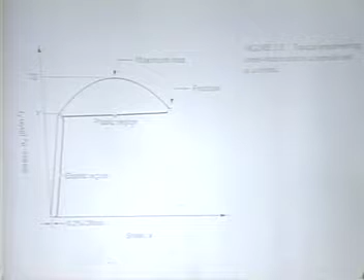Mechanical properties are experimentally derived from testing a round tensile bar or flat tensile specimen, exposing it to a load, and tension means we're pulling it, okay? We attach strain gauges to measure the displacement in a specified area. If we divide the load on the bar by the original area, we have the engineering stress. If we take the final length, as we increase the load, the bar stretches, and eventually it necks and breaks, and we'll see that later. But if we subtract the initial length from the final length and divide it by the initial length, we have the engineering strain.

And we can plot what we call stress-strain curves. These types of curves describe the mechanical behavior of most engineering materials. Now, there are some typical properties that we can get from a stress-strain curve.

Most metals, when you stretch them for a certain amount of time, if you release the load, they'll spring back to the original length. The strain will be zero. We call this elastic deformation. If the load increases and you release the load and it doesn't go back to the original length, then we know that some plastic deformation has occurred. Plastic deformation is a permanent change in shape of the material.

So a typical stress-strain curve for a metal looks like this. It has an elastic region, and then it starts curving over. This part we call the flow curve. Where it starts curving over is usually very hard to determine, so we take a permanent amount of strain, 0.2%, and draw a line parallel to the linear part, and where it hits the curve we call the yield strength of the material, the 0.2% offset yield strength.

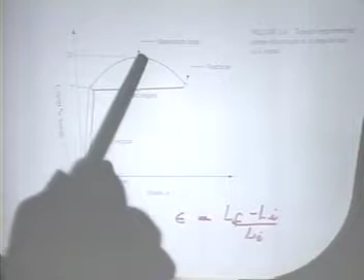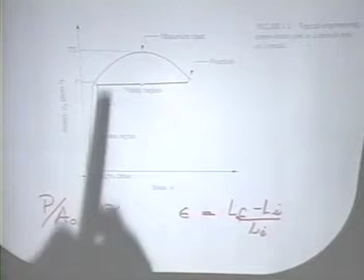Here's the yield strength of the material. We notice there's a maximum load, and after that, continued straining occurs at what appears to be a decrease in stress. At the maximum load, if we divide that by the original area, we have a property we call the tensile strength.

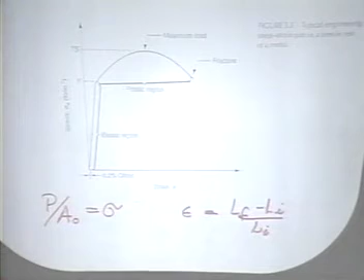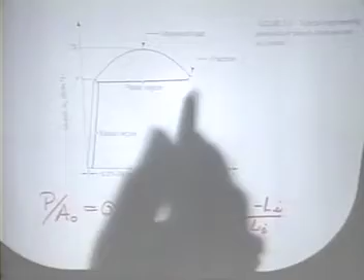That really defines how much uniform deformation we can have in a material, and you're going to see some examples of that. Beyond that, we have local deformation. Some parts are stretching more than others when it starts going down, and then it eventually becomes so thin and so weak that the cross-section can't carry the load, and we have fracture. The stress at which this occurs we call the fracture stress.

Now, if we look at this curved part of the stress-strain curve, it follows a relationship that looks like this, except this time we're using true stress and true strain. If you look at this, something ought to be apparent to you: if a bar is elongating, and remember that volume is conserved, then the cross-sectional area has to be changing. So that's the difference between engineering stress and true stress.

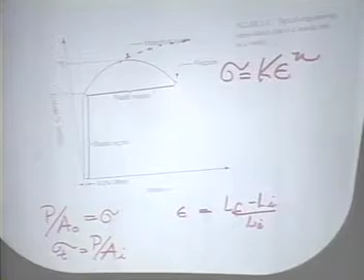True stress gives you the load over the instantaneous area. True strain is just taking delta L over L instantaneously, and a true stress-strain curve will actually continue to increase. But the engineering stress-strain curve is most commonly used.

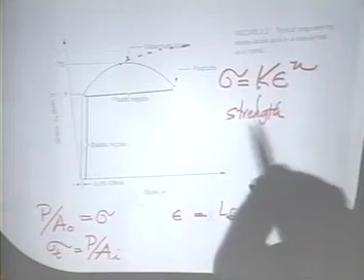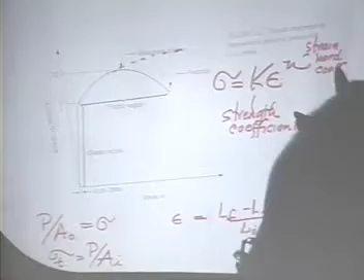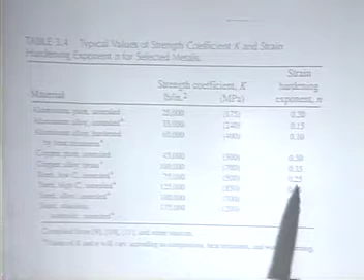Different materials have different strength coefficients and different strain hardening coefficients. Just to give you an idea, here's pure aluminum at the top with a strength coefficient K of 25,000 psi, a strain hardening exponent of 0.20. We look at a typical low carbon steel: 3 times the strength coefficient, and also the strain hardening exponent is larger. So we know that steels are generally stronger than aluminum.

Aluminum is one of my favorite materials. One of the reasons is because I spent 5 years of my life on my thesis working with aluminum, not the alloy used for beverage cans, but with a cast aluminum alloy.

When we think about aluminum, it has a lot of wonderful properties. One of the most attractive is that it is abundant and recyclable. It also has a very high strength to weight ratio, which is nothing more than the tensile strength divided by the density. It falls into a category of materials we call non-ferrous materials, not based on iron.

Metals we break into two broad categories: those based on iron, your steels and cast irons, and those not based on iron, like aluminum, nickel, titanium, zinc, copper, and lead. So aluminum is one of the non-ferrous materials. Generally, non-ferrous materials, as we saw from the chart with strength coefficients, are not as strong as ferrous materials, but they're used for their other attractive properties.

One of these is the light weight of aluminum. Also, aluminum is an excellent thermal conductor, which is why it's used a lot in cookware. Another example of a non-ferrous material used for a particular property is zinc. It has a very low melting point, so it's used a lot in die casting of intricate parts or in toys.

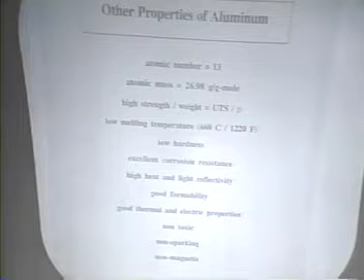Some other properties of aluminum: its atomic number is 13, its atomic mass is 26.98 grams per mole. As we said, it has a high strength to weight ratio, ultimate tensile strength, the top of the stress-strain curve divided by the original area over the density. The low melting temperature makes it energy efficient to cast aluminum, near net shape manufacturing.

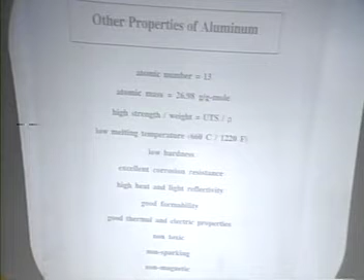It's pretty soft, as you can see from these cans. It has excellent corrosion resistance - who would want to drink a Coke out of a rusty can? It has high heat and light reflectivity, good formability, which we'll talk about later, good electrical and thermal properties, non-toxic, non-sparking, and non-magnetic.

When we talk about aluminum alloys in general, we divide them into two categories: those used in cast form, poured from the molten state into a mold and allowed to cool, and those that come from a billet, which is also cast but then rolled into sheets and plates or drawn into bars and tubes - these we call wrought.

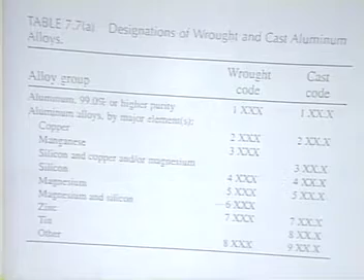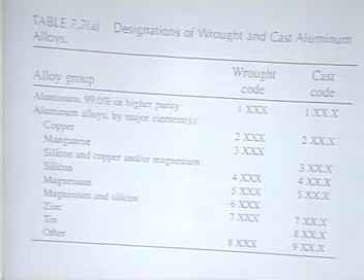So here's the designation of wrought and cast aluminum alloys. The designation system from ASTM, the American Society for Testing and Materials, gives you 4 digits for wrought materials and 4 for cast, but with the cast ones, after the 3rd digit, there's a decimal point. Looking at the temper designations, this 4-digit code indicates the principal alloying agents.

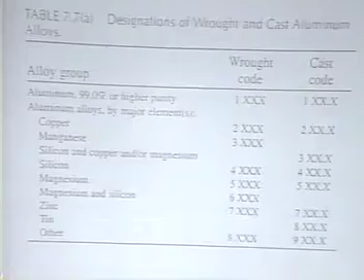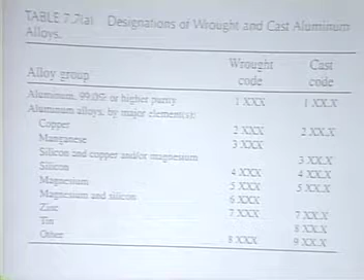Aluminum, like most materials, improves its properties with the addition of an alloying agent. This is why we alloy. Aluminum does not have complete solid solubility. It shows a limit of solubility, and that can be used to our advantage, particularly in cast materials and in wrought materials when we do temper treatments.

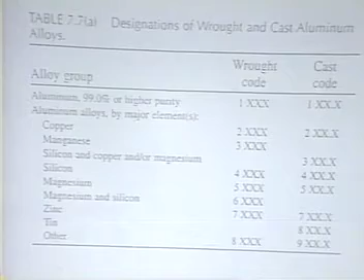So this is a designation system for wrought and cast aluminum alloys. The aluminum alloy we use for a beverage can is alloy 3003, and it starts out in the annealed condition.

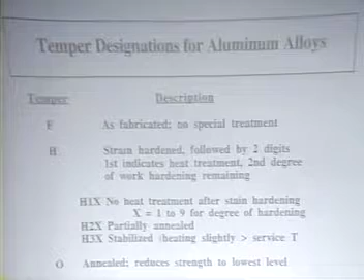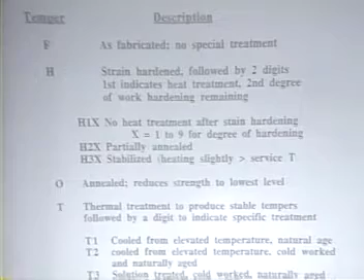When I said it starts out in the annealed condition, one way we control properties in alloys is by chemical, mechanical, or heat treatments, and that's what these temper designations mean. Your F temper, for instance, means no special treatment, nothing's done to it. Your H temper is strain hardened, followed by two digits: the first indicates a specific heat treatment, the second the amount of work hardening, which is the inverse of formability.

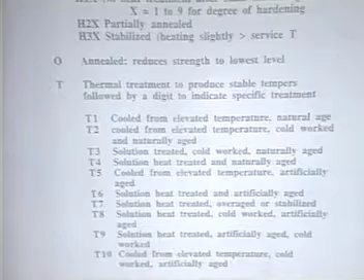Here are some H designations. O is annealed, the softest condition, and this is where we start with the cans. The T tempers are usually special treatments to give us special properties. One of the ones used most often is the T6 temper.

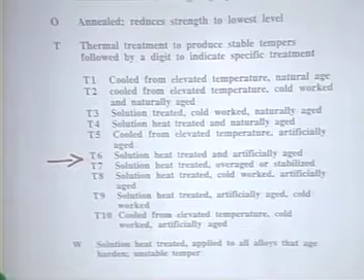Remember, aluminum doesn't dissolve other metals totally. The nickel-copper system dissolves infinite amounts of each other, forming a complete range of solid solutions. Aluminum has limited solubility. What I mean is, everybody's had the experience of sweetening tea, especially unsweetened tea you get in restaurants when it's cold. There's only a certain amount of sugar that the tea will dissolve, and once you pass that limit, the rest settles out as a separate and distinct entity.

That's what happens when you add more than 1.5% manganese to aluminum to make alloy 3003. It can't dissolve more than 1.5% manganese.

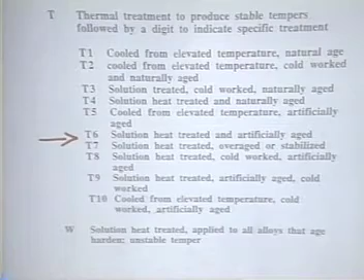Now we can use this to an advantage. If we look at the T6 temper, particularly for a cast alloy like 357, which is used for a lot of structural and aircraft applications - there was a Navy plane we were working on that had a cast 30-foot bulkhead of A357 in the T6 temper. So all we did was, by tempering it, which is just a heating and cooling cycle, we changed the properties.

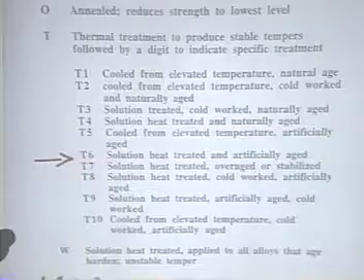We know that in the normal condition, we can't dissolve much silicon or magnesium. A357 is an aluminum-silicon-magnesium alloy, 7% silicon. The solubility is 1.2%, so the rest is left there.

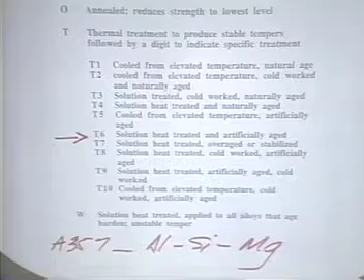One way we can increase the solubility is to do the same thing as when you make tea at home - you heat it up and add the sugar when it's hot. So we heat the metal up and increase the solubility. This is in the solid state, however. These are solid treatments; we're not remelting it.

We've already shaped the part. We heat it up. But even in the solid state, as the temperature goes up, atoms can add themselves to the lattice of aluminum and form a solid solution.

Those that are outside of the lattice, on quenching and reheating at a lower temperature - that's the aging treatment, the artificial age - come out in a preferred way, which makes deformation hard and makes the alloy very, very strong. Another advantage of the artificial aging and the whole T6 temper is that it improves the ductility, making the stress-strain curve go out longer so there's more deformation prior to fracture. The last thing you want in an aircraft part is for it to break.

So this is why the tempers are used to change the microstructure, and the point I want you to get is that it also changes the properties, the mechanical response of the material. So there are lots of temper designations, as you see here.

Now getting back to properties: aluminum and its alloys, if you think of modulus of elasticity, that's nothing more than stiffness. And again, we know aluminum's a lot softer than steel, titanium, tungsten, or iron, but not as soft as lead.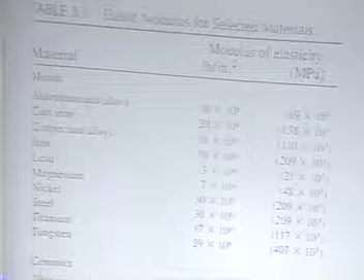The elastic modulus, if we go back to the stress-strain curve we had before, is nothing more than the slope of the linear part of the curve - that's the stiffness or elastic modulus of the material. So here's aluminum compared with other metals, as well as with ceramics and polymers, which we know are usually not as stiff unless they're very highly cross-linked or treated.

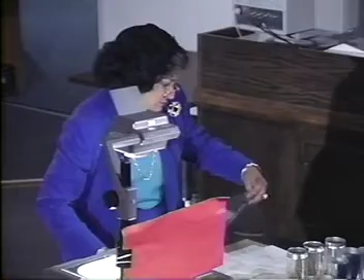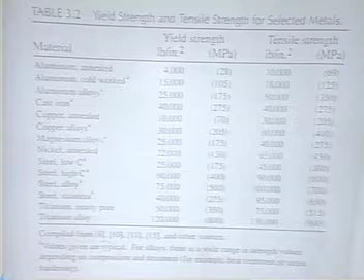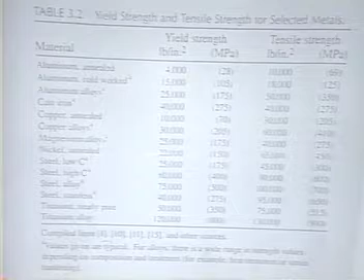Okay, looking at the yield strength and the tensile strength, aluminum in the annealed condition has a very, very low yield strength. That means we can change the shape with a minimum of energy and force, a very low 4,000 pounds per square inch stress. And the tensile strength, the limit of uniform deformation, the peak in the stress-strain curve, is 10,000 psi or 69 megapascals.

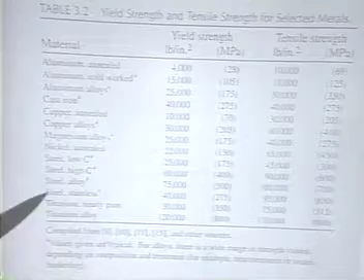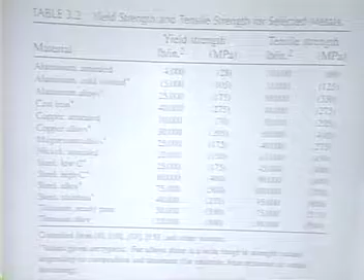Again, we can look at a low-carbon steel, like a 1020 steel, and we can see the big difference between the aluminum and the low-carbon steel in terms of yield strength, when plastic deformation begins, and how much stress it can stand for uniform deformation. This is the tensile strength.

Now, in the manufacture of beverage cans, we're looking at aluminum alloy 3003, and this is what it looks like in terms of composition. Just a little bit of silicon, a little bit of iron all the time, trace amounts of copper. The major alloying agent is manganese, with from 1.0 to 1.5%.

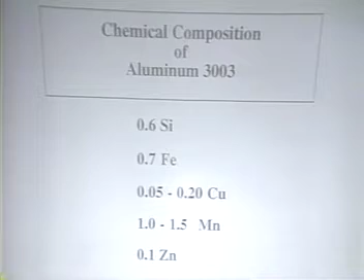If we think of ways to harden an alloy like this one, we're talking about what we call a single-phase alloy. In other words, all the sugar is dissolved, and it's not distinct, not settled out at the bottom. It's in solution. So the only way we can harden materials like this is by working it or by controlling the grain size of the material.

Now, to make a beverage can, we're starting with sheet, and we're going to punch it out until we elongate it all the way up. So that's a lot of deformation, a lot of strain hardening going into the material.

Some of the uses of this alloy, in addition to beverage cans, are cooking utensils, storage tanks, awnings, furniture, roofing and siding, highway signs—anything that requires moderate strength and a lot of formability, a lot of deformation, a lot of change in shape.

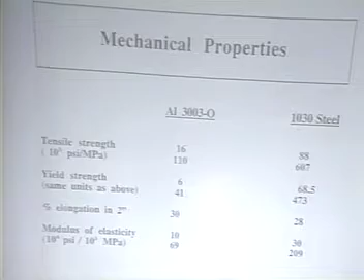Okay, so let's go on now and talk about the manufacture of the aluminum beverage can. It starts out as a 20,000-pound ingot. It ends up as a 3-ounce can.

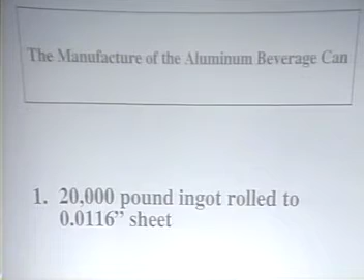This ingot is probably continuously cast. That means the molten metal is put on a chilled substrate and pulled out through water jets, literally. So a solid skin forms as it passes through this cooling chamber.

You can have billets very, very large. One facility of Alcoa's, for instance, in Alcoa, Tennessee, right outside Knoxville, produces these billets at about 30 feet long, about 10 feet wide, and about a foot deep. They come out of these huge vats of molten aluminum, pulled through a cooling chamber until a hard shell forms, and then they're pulled off and rolled on to the next cycle.

Now what happens is they go through a series of what we call rolling mills, and in these rolling mills the billet is flattened out, and all that happens is something like this. Actually, the billet gets flatter and it gets longer, because they have constraints on the side of it.

So it's 2 sets of steel rolls. Here's the billet where it comes in, and here's where it comes out. In this case, we're seeing that the billet is getting wider—it's probably compressed from the top, just looking down on it. But in the case for aluminum cans, it's just getting flatter and getting longer.

Now, when we put it through the rolling mills, we're doing it when it's warm, so we're allowing some healing to occur. It's fully solid, but we're allowing some healing to occur internally.

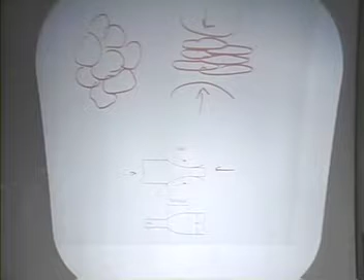And after rolling, these are the rolls. They're going to come out elongated and flattened. Okay? And also any little holes, voids in the material will also be healed. So this 20,000-pound ingot then is rolled into a...

0.0116-inch sheet. Okay, it's never going back to being a 20,000-pound ingot again. Why? Because we passed the yield point of the material. We're now in the area of permanent deformation. Okay? We're in the region of what we call uniform deformation, from the beginning to the end there.

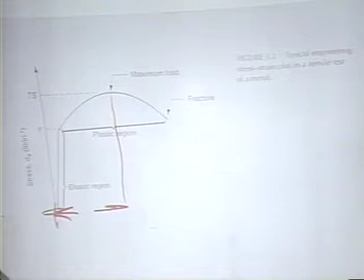And we've had a permanent change in the shape of the material from being, say, 20 by 10 by 12 to maybe being, say, 50 feet long, the first pass, by maybe 5 by another dimension. So what we've done is change the shape. We had to exceed the yield strength of the material.

Okay? Now, referring to the tensile specimen that generated the stress strain curve, it looks just like a flat bar or a round section of this could be a cylindrical section on a circular tensile bar. This is your gauge length.

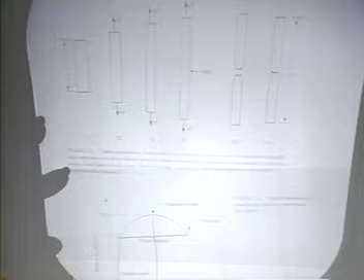When we look at the stress strain curve here, during the elastic part, the bar is stretching uniformly along its length. Okay? Once we reach the maximum load here, it tends to deform more in a local area than along the whole length. That we call necking. So this is where necking starts, at the top of this curve.

And the cross-section then becomes smaller at a much more rapid pace and a lot longer and eventually breaks off. Okay?

So what happens then during this rolling, to get this sheet that's 0.0116 inches, it's going through a series of rolling mills and getting thinner and thinner and thinner and thinner. Okay?

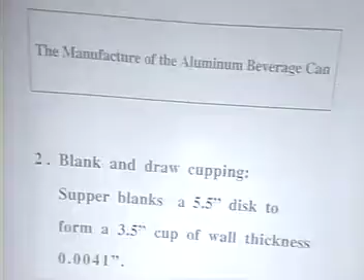So finally we get this sheet that's 0.0116 inches, and then we start another process that we call blanking and drawing. We start out with a blank, and it just kind of punches out a 5.5 inch disc. And then another punch, and I'll show you a picture of it in a minute, actually forms a draw cup. This is the first step.

This was a flat, cylindrical 5.5 inch disc. Then a punch comes down the disc and makes it into the blank draw cup.

So then drawing then as a process refers then to the formation of a flat metal sheet into a hollow or a concave shape, such as a cup, and all you're actually doing is stretching the metal. Again, you have to have exceeded the elastic limit, or else when the punch came out, this would go right back to being a flat plate.

We permanently changed its shape. That's what we call plastic deformation.

Now the process of making aluminum cans is what we call deep drawing. And that's deep drawing because the depth of this draw here is actually going to end up being greater than the diameter. And that's what we call deep drawing.

So what happens then, this blank, this 5.5 inch disc forms a 3.5 inch cup. Here it is, and here's the wall thickness of 0.0041 inches.

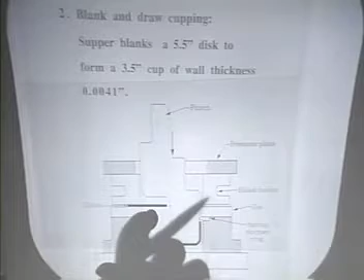And this is what it looks like, kind of. There's a punch, quite literally. Here's the blank, the flat 5.5 inch disc. This punch comes down and pushes it into this shape, stretches it into that shape. Okay?

Okay, now, we still don't have a whole aluminum can here. So what we do then is use what's called a body maker, and we keep on drawing and redrawing the cup. Punch, keep on punching, successive punching cycles.

This is the final redraw here. Now it's a 2.6 inch diameter can. The diameter of the final can of Coca-Cola, Mountain Dew, Pepsi-Cola, whatever you like. Okay? So again, this is just a continuation of the drawing process.

Some of the properties that have, factors at least, that affect this process are the properties, of course, of the metal. If you had a piece of glass and you put a punch in it, glass is a ceramic, it would break. If you had a piece of very brittle material, very, say, high strength aluminum with very little ductility, and you put this punch in it, again, instead of stretching, we would induce cracks and failure.

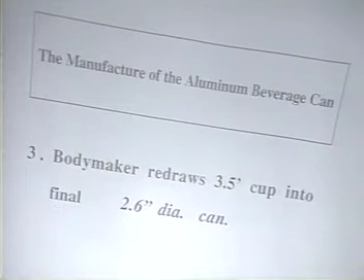Okay, so the properties of the sheet metal. Also, we have to be concerned with the ratio of the blank diameter to the punch diameter. We have to be concerned with the corner radii, so they're not so sharp that they actually puncture the material. And obviously, because we're pushing like a plunger on top of this plate, we've got some friction and lubrication problems. So these are some of the things that we have to think about in this process.

Okay, so now we've got the final 2.6-inch diameter can. And the next thing we do is iron this can.

Not ironing in the traditional sense. We really want to change the sidewalls from 0.012 inches to 0.0042 inches, and bring it up to the full length. We don't want to change the diameter again.

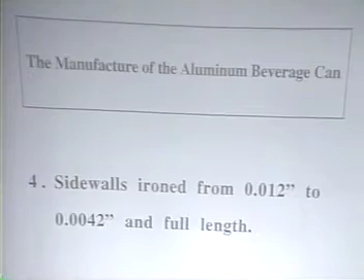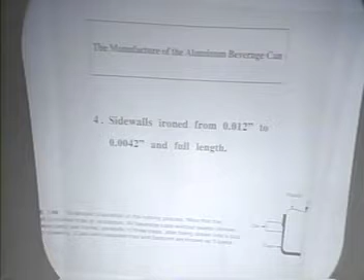It's called an ironing process. It's kind of like a pressing process, if you will. If you look at this schematic, here's the die, here's the side of the cup, here's a punch, and you've got a die on. The die and the punch go up the walls, thinning them out and elongating them in each ironing pass. So ironing is the name given to a process of thinning the walls of a drawn cylinder by passing it between a punch and a die.

Here are the walls, and see how it's thinner here? Is it thicker here where the die hasn't moved up? As the die moves up, the walls get thinner, and also the side walls actually get taller.

So this is the fourth step in the manufacture of the beverage can. Now we've got to prepare the body for necking.

So here we are, this is after the last iron. Then we have to trim it off first because we want a certain height of the beverage can. We don't want uneven beverage cans. How are you going to put a lid on something this crooked and uneven? And who would want to buy a soda out of a can that looked like this? So we trim it off. It's a metal finishing operation.

Then we start locally deforming the can so that it can accept the top, and that's called the necker.

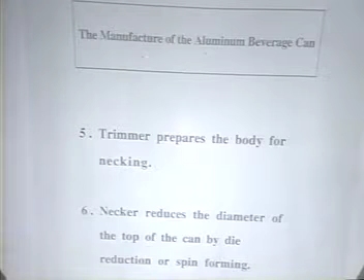So where are we now on the stress strain curve? Almost at the end, where do we start? We're beyond the maximum load because that's where necking occurs. We've got uniform elongation, uniform deformation until we get to the maximum load. So this tells you that in this operation, the stress has to be higher than that peak in the stress strain curve to have necking.

So here is the first neck. Sometimes they spin it a little bit and continue the stress to give you the second neck. Let me put a flange on it, and it can accept then the top of the can.

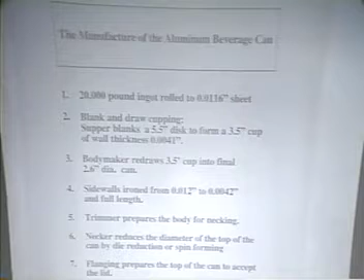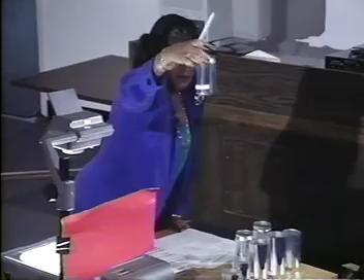So looking back at the steps in the manufacture of the aluminum beverage can: we start out with the casting process, then we go to a rolling process through a series of rolling mills. The rest are basically cold or warm work processes in which we do a series of drawing operations to give the basic shape, to get to the final diameter, to form the cup. Ironing thins out the sides and gives us the length we want. We do some more machining to prepare it for local deformation and to give us a uniform height. We do some local deformation at the top of the can to give us the surface we want to accept the lid. So this is the manufacture of the aluminum beverage can.

Now, you know I'm a teacher, probably, and I don't have a class this quarter. So, who can tell me now, why is aluminum used for beverage cans? Why don't we make them out of lead? Why don't we make them out of steel? Why don't we make them out of nickel?

Because they don't rust as quickly. She said they don't rust as quickly, that's right. Another? It's abundant. Yeah. It's recyclable. Good. Non-toxic. What else? Tell me about processing. It's easily shaped. So what does that mean? Cheaper to make, very good consideration. Less energy to make because it has what? Low stresses for permanent deformation. The more stress you have to put into the forming operation, the more expensive it is, the more energy is used. You can use it again, recyclable. Okay, so are there any questions?

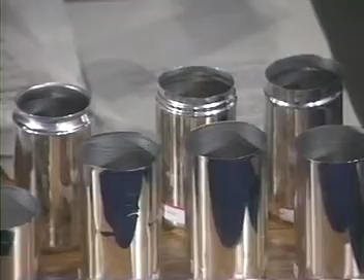The cupper produces 14 cups per stroke at speeds of up to 250 strokes per minute, just to form this part out of the 5.5-inch disc. So 14 times 250 will give you how many cups per minute? It's a lot of cups.

The lid is stamped out, and then it's press fitted on after filling. Does some of them need to be annealed during the process?

Most of this, and I actually checked with friends of mine at Alcoa, is done as I said in warm working. So that's that continuous anneal they're doing, not hot working, and not really cold working either, because this is a whole lot of deformation. But it can be done in the warm working regime.

What that means is that any defects created in the microstructure as a result of stressing it - and that's all this is doing, stressing the material - that's why when you see the stress strain curve it goes up like this. A continuous increase in stress keeps deformation going, and we're actually changing the microstructure, creating little defects.

These little defects tend to make it harder and harder to deform the material, which it is, and it also tends to shorten the time to fracture. So what you typically do is keep it warm, because with increased warmth, atom mobility increases with temperature. So some of your defects, the atoms will rearrange themselves to eliminate. If you do it in the warm range, this rearrangement is occurring while the deformation is occurring, so you're minimizing the effects of the defects.